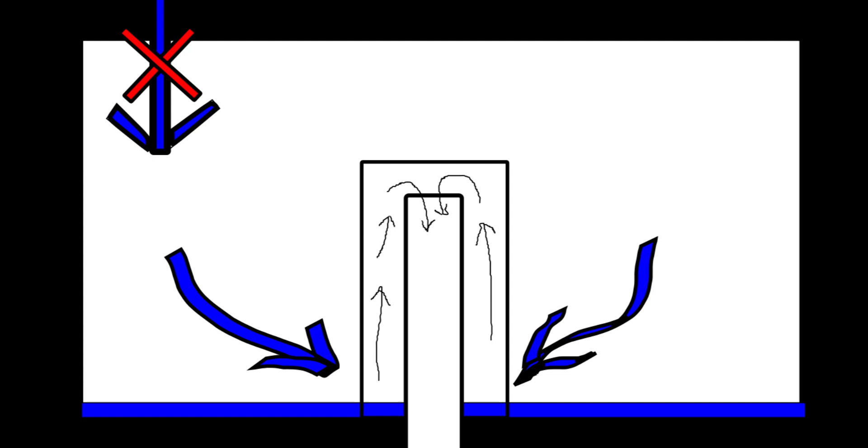Then this is going to be a crude animation of what's going to occur, although there are far better illustrations elsewhere online, I'm sure. This is what I was able to come up with. The water level is going to come up. It's going to fill inside the bell and above, as long as it goes above that downpipe with a sufficient volume to then have enough fall down the downpipe to create a flow to then actually pull the remaining air out of the bell and start the siphon.

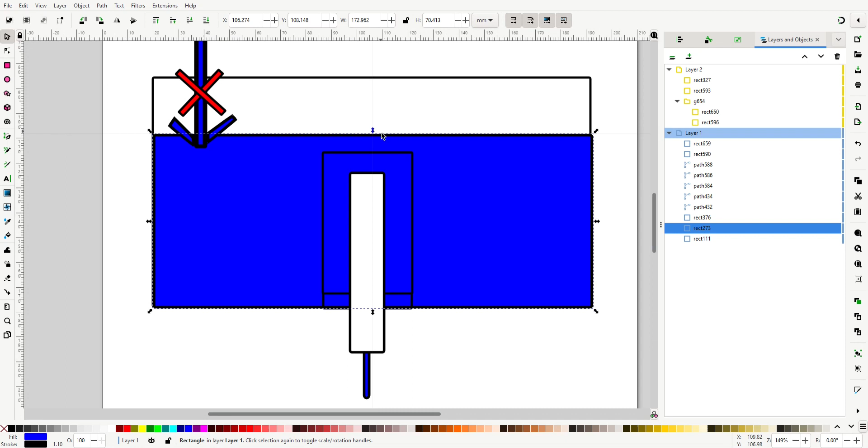We shut the water off at this point. Now that the siphon is initiated and we're no longer adding water to it, the water level is going to drop. It's going to drop outside of the bell first, which is an airtight vessel, except for the holes at the bottom. And that's where the water is coming in. So again, those holes need to be large enough to allow this volume of water through to not starve it for flow.

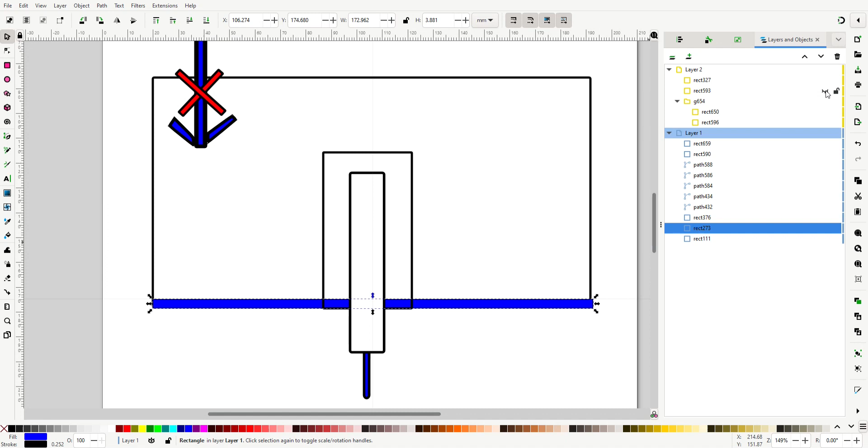Once we get below the air holes on either side, or the passage holes on either side, air will be admitted into the bell, and that will break the siphon. As long as we always shut the water off, that's going to work.

Coming up is going to be a picture of one of the PVC pieces that I used, which is a 1¼ inch to ½ inch reducer bushing, and this is intended to take slip fit. So you just take a piece of ½ inch PVC pipe and you slip it into this female that we're looking at.

The rib or ridge that we can see at the bottom, where the hole gets slightly smaller down inside the center of this, needs to be removed, because we're going to pass a plastic PVC nipple through this. And as we come into subsequent photographs, you'll understand why that is necessary. So that rib needs to be removed.

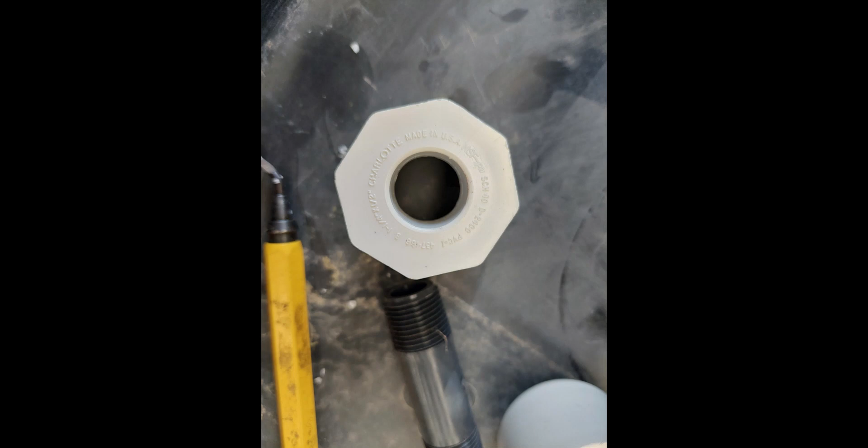And once we've removed that, as you see in this photo, I used a deburring tool, the yellow handled tool to the left. After I got rid of most of it with that tool, I also had to come in with a Dremel tool and a burr grinder and finish removing that.

And then at the bottom of the photograph there, we have a ½ inch PVC nipple. It's a Schedule 80 nipple. I've forgotten what section. It's near the plumbing, but it's not exactly plumbing stuff. I don't remember if it's EMT conduit stuff. This was at an Ace Hardware, so it's not an incredibly well-stocked industrial supply. So this should be relatively easy to come by.

And you'll see why I used a threaded nipple in a few moments. But now I can pass the smooth bore of that nipple down inside this hole all the way top to bottom and actually protrude from the bottom.

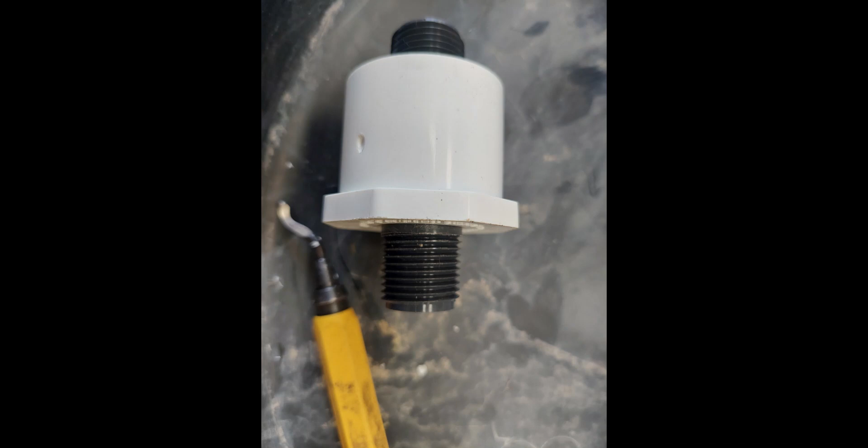And that's what we're going to see in this next photo, is that now I will have driven that nipple all the way through the bushing. This is a reducer bushing. So again, 1¼ inch. And I chose 1¼ inch because it was going to allow me enough flow for the water coming in and enough volume or passageway, or in square inches anyway, to meet or exceed the amount of square inches in the down tube in that gray PVC piece here.

Another key consideration I'll touch on in a few moments in a later photograph, but right now this is where I've driven the nipple through, and the nipple is driven through such that some of the smooth wall sticks out of the bottom, and that's because I'm going to put an O-ring around here to seal this up to the inside of the vessel that I want to be siphoning from. And I also need to have enough room for not just the O-ring to not be blocking threads, but also to allow, even after I run the tightening jam nut up on this, to hopefully leave me with enough threads that I can connect a PVC female threaded section to, which we'll talk about a little bit in a moment.

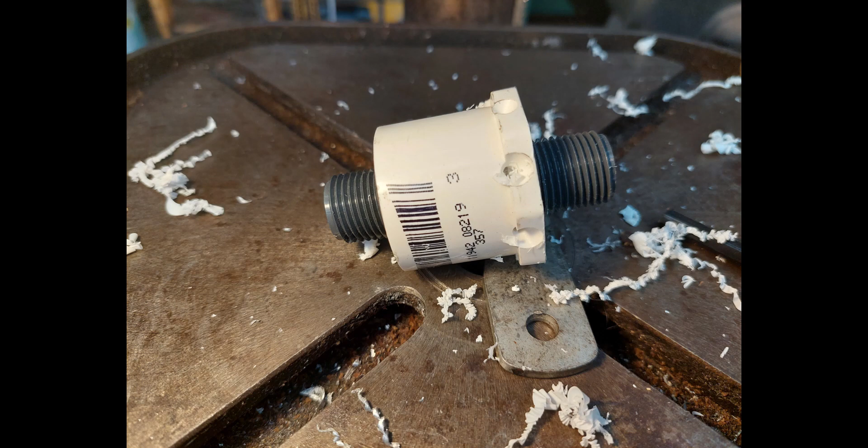And here it is after I have taken it over to a drill press. You could try to do this without a drill press, although it'd probably be far more challenging. I used a center drill to make these little pips all the way around here. It's a hexagonal nut. Basically, this bushing is, for some reason, formed as a nut. So it's got 6 sides. I drilled 6 holes. The center drill made it very easy for me to do it without the bit wandering around. And then this is just a flat piece of metal that's laid underneath there to hold this at an angle. I wanted the drill bit not to go straight in.

I wanted it to go as low to the right in this photo as possible to scavenge water as far down into the vessel as possible, and then carry the water up into the air passageway inside of this bushing. And that's going to be important here in a moment, but let's finish looking at these holes. I then came back with a proper drill bit and drilled the holes out, deburred them, and got them far cleaner and neater. So they should flow water better, and they also shouldn't catch so much trash, especially if you have algae or something. In this case, I'm going to be using this for automating water in large aluminum trays, and I'm going to get various grow media, and maybe some algae, and I don't want them to get clogged up. If I can help it, I may still have to put a filter around the outside of this, but anyway, that's why this is.

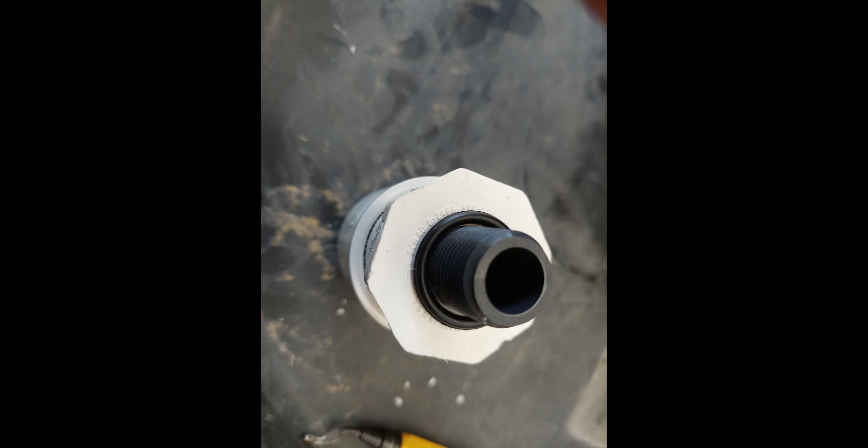So in the next image, and I didn't do a very good job here of documenting this, and I apologize for that. I'll try to explain through this. It'll become more clear in a video section that's going to be following this in just a few moments, actually.

But what this is, of course, is the 1.25" to 1/2" reducing bushing, and what you see down below on the work surface is actually a 1.25" PVC cap. The bushing is male. It's intended to go into a female fitting. And so if I wanted to attach a piece of 1.25" tubing to this, I would have to put a coupler on the reducing bushing, then insert the piece of pipe, and then I could put the cap on it.

Well, I wanted to make this short. The goal of this project is to have a maximum flood of whichever vessel this is placed into of about 2 vertical inches. So I didn't need a piece of pipe. By the time I put a coupler and everything else on there, it was going to add a lot of unnecessary plastic to this.

That's why the nipple was chosen at the length that it was chosen, because by the time I protrude out of the bottom, as you see here, I've still got about 2 inches from this hexagonal face that we're looking at here, up to where the water will then spill over and initiate the siphon. So it gives me the 2 inches of vertical that I'm wanting to have. And I didn't need a section of pipe. I mean, I could have done a section of pipe and still used the short nipple. It was just unnecessary. So this bushing, being male, fits nicely into the female 1.25" cap.

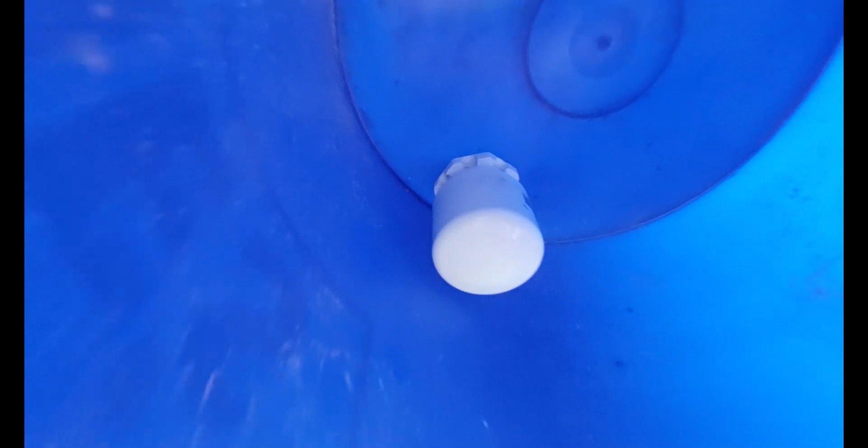There are the holes. I used a little bit of Teflon thread sealing tape on the slip fit there, because this is not glued yet. This is just testing. So I didn't want to glue it until I was kind of sure it was going to work. So it was not quite as tight a fit as I'd like. So I put a little bit of Teflon tape around there just to seal that up.

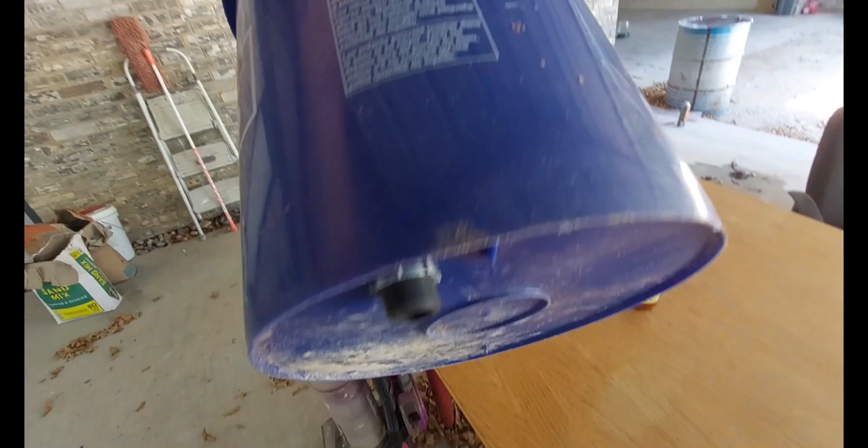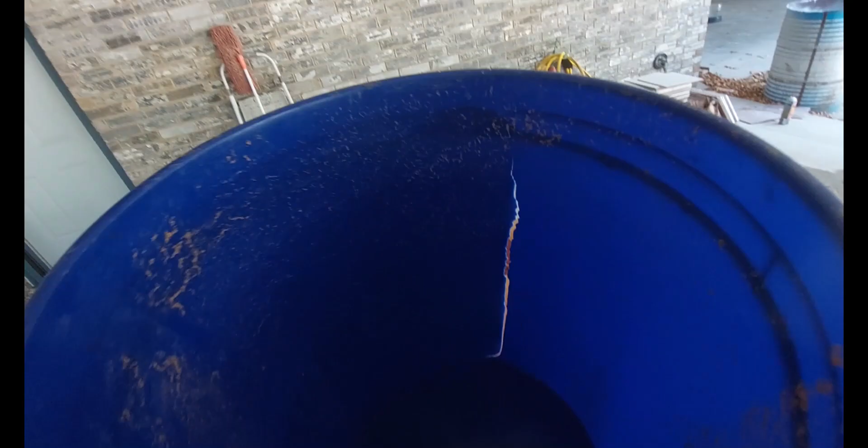And then protruding out of the bottom of the bucket, I used an EMT lock ring. They have 1/2" EMT, 3/4, 1 inch, and so forth. Well, the 1/2" EMT is using 1/2" NPT threads. So that's a 1/2" EMT lock ring holding that nipple sticking out of the bottom of the bucket there. I'll go over here and I'll flood this with a hose and see if this works. And I'll obviously have to lay it on quite an angle to keep the water from pouring out of that thing. We'll find out in just a moment.

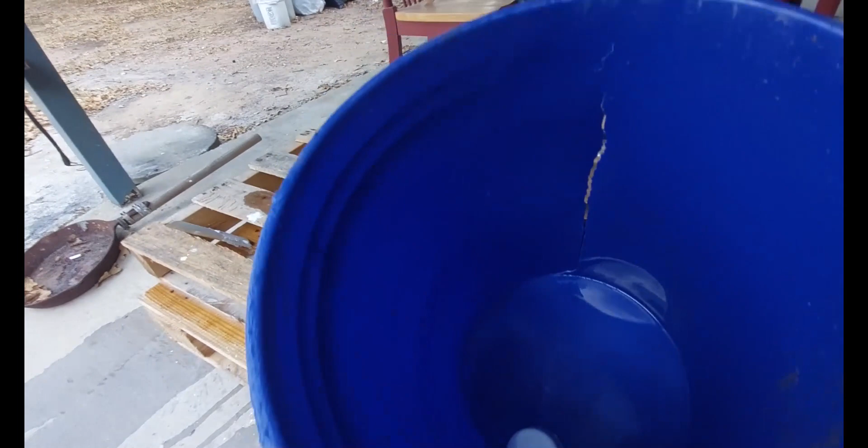Okay. And the siphon has initiated. And this would probably work better if I wasn't using Teflon tape, if I'd actually glued those two pieces together. But for testing, I just wanted to slip them together. And there, it broke siphon right there. It got to one of the holes.

Obviously, if this was on a level surface, it would pull the water down uniformly instead of just in the corner like this. But that's about as deep as it's going to get, or shallow as it's going to get, I guess I should say. It's not going to pull it down a whole lot further because of how far up from the bottom those holes are. But in any case, there, for about $6 worth of PVC pieces, very quick and easy to put together the bell siphon.

And I've got aluminum troughs, actually aluminum sheets that I'm going to turn into troughs, very big trays that I'll be putting plants in, and then I'll set up a timer to automatically flood them to above the siphoning level and then shut off and allow it to drain so that I can water them automatically every day or every other day, depending upon what the needs of the plants are. Anyway, pretty quick and easy to put that together.